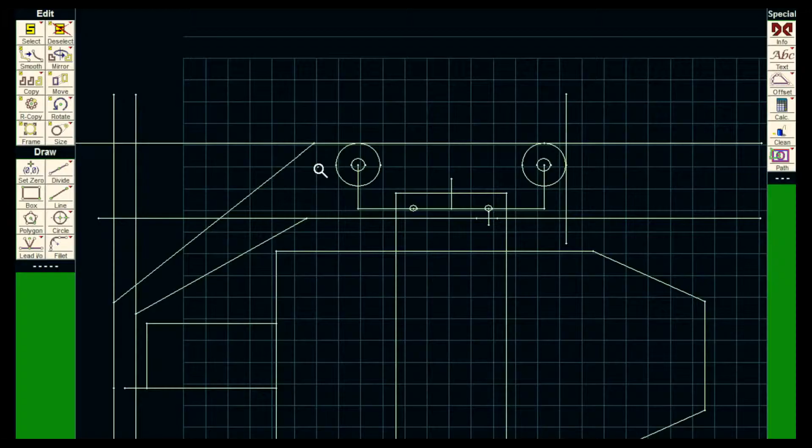Now you could be wondering why I copied it. Well, usually, and I've not done it so much with this, I'm always copying and pasting. As I progress with the drawing, I copy and paste, so I can see a trail of how I've gotten to where I want to get. Especially if I find a problem down the line, I can go back and retrace my steps, and I don't have to start all over again. So that's why I'm doing that.

I'm about to strip away the turbine part of it and just leave the turbine mount itself, and I want to make sure, if I need to check for tolerances or fit, that I can put the engine back in again. So hence leaving a copy to the side for afterwards, just in case.

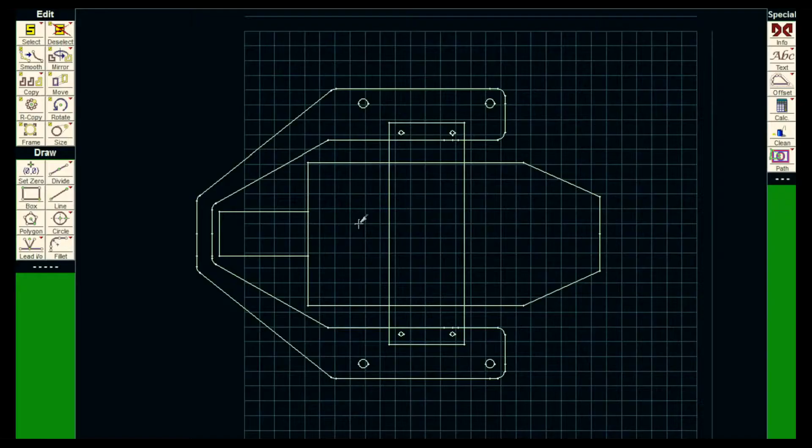So that's pretty much the drawing done. What I'll do now is use the software. We've got further software that converts it for the water jet cutter itself, and it'll convert it into a file. What it will show you is the path that the water jet cutter will take as it cuts out the piece of titanium.

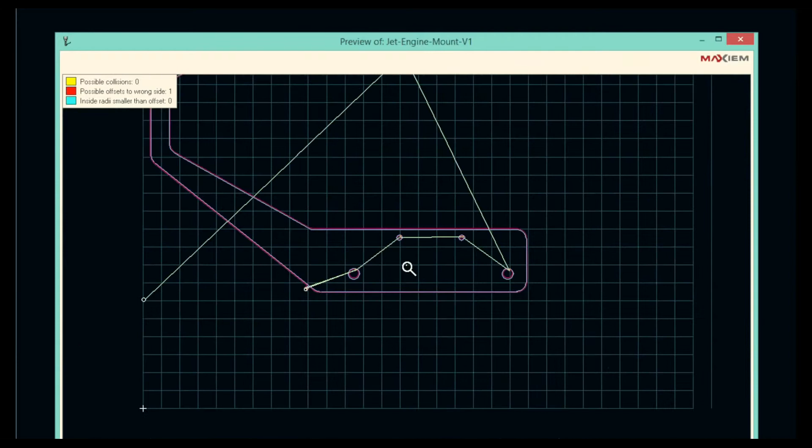So those pinkish reddish lines, they're basically where what's called the kerf. That's the width of the cut when the water jet cutter cuts through the metal or whatever you're cutting through, and that's typically around 0.8 millimeters wide. It varies from 0.7 to 0.9, and you can get a lot narrower if you put on a narrow nozzle, but I won't go into that here. So that's pretty much it, that's it designed and ready to go on the water jet cutter.